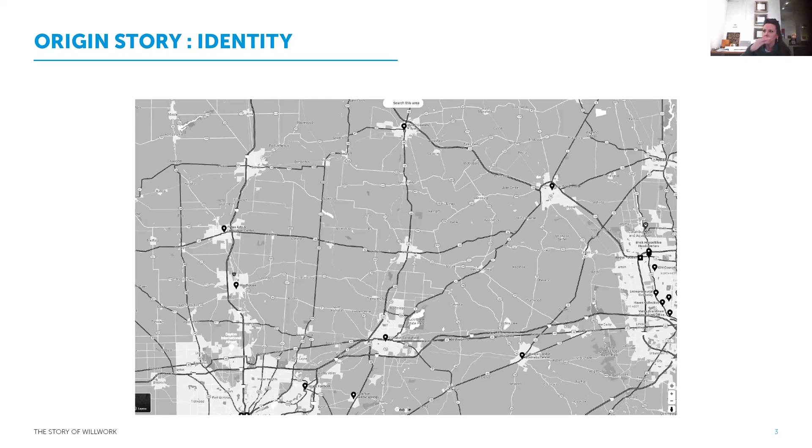But co-working is definitely something that I see as being important to the future of Urbana.

I did these three shots here for you to see. This is Urbana, and our county is very agrarian. Urbana is our county seat, with a population just over 11,000, but we are outside of a few small villages — the only city, I believe, in Champaign County.

This is a slightly larger view of Urbana — the entire city, 11,000 people. Here in the middle, the wider area, that's our downtown historic district, blown up here on the right. We have a town square, and our historic district includes that square, plus two blocks to the north and two blocks to the south.

The Willman project is right here in the historic core, on North Main Street. We are within walking distance very easily of downtown, where we have lots of restaurants, the brewery, etc.

Just a little bit of history about the development of Urbana. Urbana was founded in 1805, and its downtown district is centered on Monument Square, which features original 19th and 20th century commercial architecture typical of Midwestern county seats. The downtown was developed primarily during the railroad boom era of the 1850s to 1890s, when Urbana served as an important rail junction.

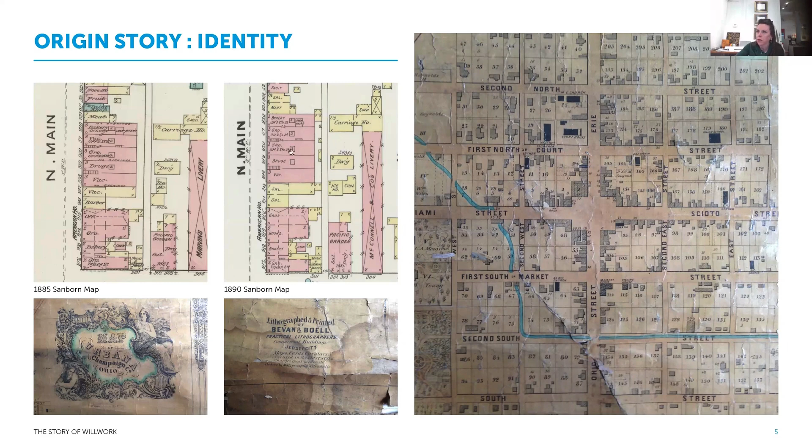One of the fascinating stories about the project was that each bay was a different business. As I read more into the history of the building, I discovered — and I don't think it's on either of these maps, it's in a later Sanborn map — that at one point an Italian shoe cobbler purchased one of the bays, or started a business in one of the bays of the building. He expanded and owned the entire thing prior to selling to the Willman Furniture Company. So an entrepreneur — this building has been full of entrepreneurs since the beginning.

All around the square, we are lucky to have an intact historic district.

Going into the Willman Furniture Company, it finally closed because the owner, the most recent owner, had some health issues and decided it was more important for him to retire. He tried to sell the business, but unfortunately, a 7,500 square foot furniture store in a historic downtown with no parking available just isn't as viable for many entrepreneurs as you would hope.

In the basement, we had interventions structurally. There's a pier here, but we have dirt floors, and as you can imagine, over the years, a lot of things were chopped up.

Getting into the concept of repurposing the building, after searching for retail tenants, specifically furniture stores, the owner Jamin wasn't able to find anybody to carry the legacy of the Willman Furniture Company forward, which was the original idea. However, he did learn about a Jobs Ohio grant, a Vibrant Communities grant given in Ohio in specific small towns that are considered economically distressed.

What they would be looking for in order to provide grant funding is a catalytic business. So he shifted his attention to trying to find a way to bring Cohatch or some co-working community to Urbana, but they didn't have the bandwidth. Build in Bellefontaine was expanding to Marysville, and Cohatch was opening 30 sites simultaneously at the time.

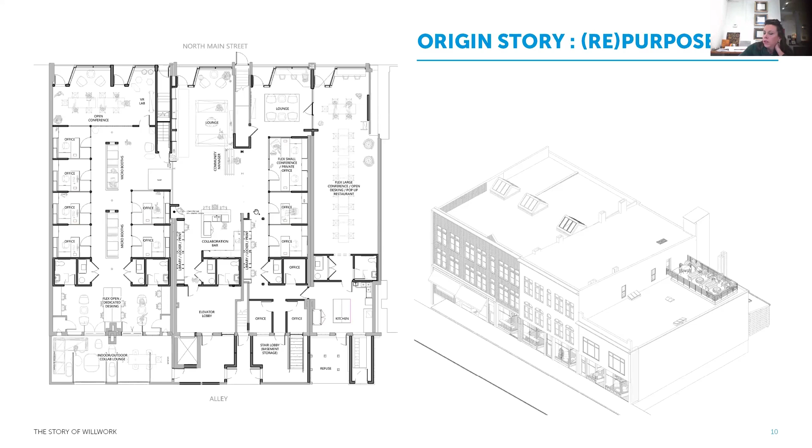And so I basically worked on this floor plan, and we started working with these 3D views of that floor plan. We started working with Champaign Economic Partnership. I think Richard Ebert is on the call, he's the director. And we worked with Vibrant Communities, Sarah Spies, and a few others to get through.

We had to do a pitch deck for the project, talking about the history, the proposed use, which was not only the co-working space on the first floor, but the upper two floors would be converted into loft living spaces for nine lofts. We also had historic tax credits on the project, and worked with Roger Farrell, a consultant out of Columbus, whom we'd worked with on prior projects to pursue historic tax credits.

So this all started in 2018, just the revitalization of downtown, and we had to prove that the business, the apartments, that all of that was feasible, that there was market demand, and sort of also represent the financial need for the project to happen.

So the catalytic nature of Urbana's downtown was kind of borderline. We were already, because of the brewery and because of some of the revitalization that had started in 2018, there was a little bit of question as to whether or not Urbana could be considered in need of the grant funding, even though we were still designated as an economically challenged community.

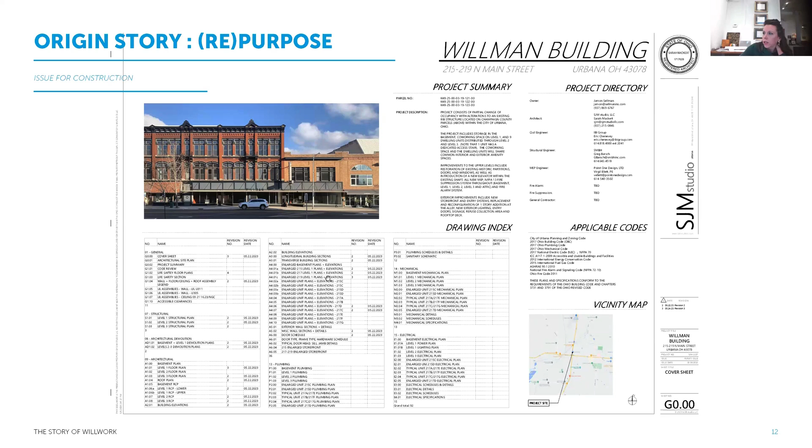So getting back to the co-working space and the architectural design - once we knew that the financing was going to work out, I put my architecture hat back on for a while and basically did the full design for the project, the construction drawings, working with structural engineers and my MEP engineers to completely renovate the building.

We did an existing building code review on this project. Some of you may be familiar with this, but when you work in existing buildings, you're able to look at life safety as a scorecard instead of conforming to current code for fire suppression, fire alarm system, all of the things that we're required to do today with fire separations, et cetera.

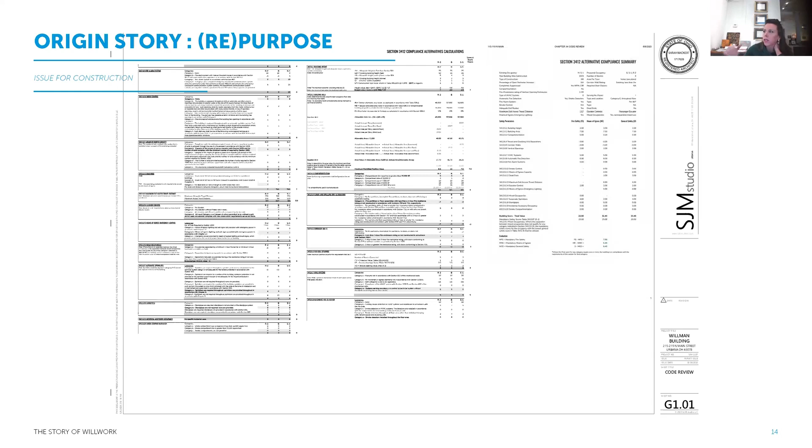We are able to basically evaluate the building and make sure that it is safe according to a specific scoring criteria. And so this scoring criteria is pretty complex, but ultimately it allowed us to save historic doors and transoms and various things. But the building will be fully suppressed, and it will have a fire alarm system with all of the bells and whistles you can imagine.

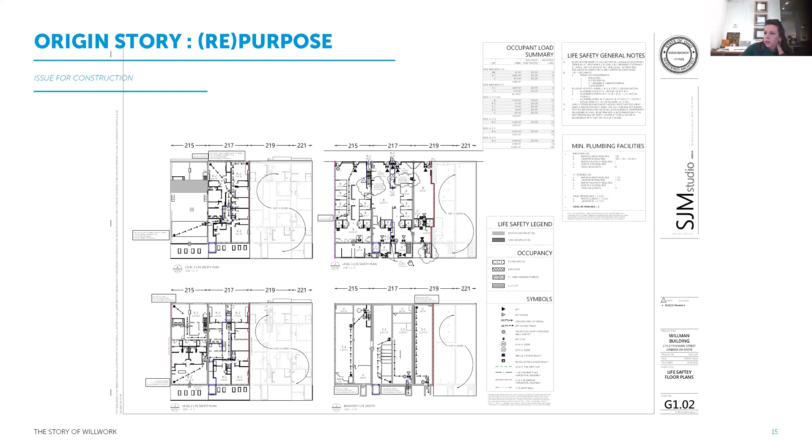These are examples of the technical documents that we create in the process of reviewing a project for life safety, and then what a construction floor plan, like the first floor, looks like—lots of interior wall type details, coded notes, et cetera.

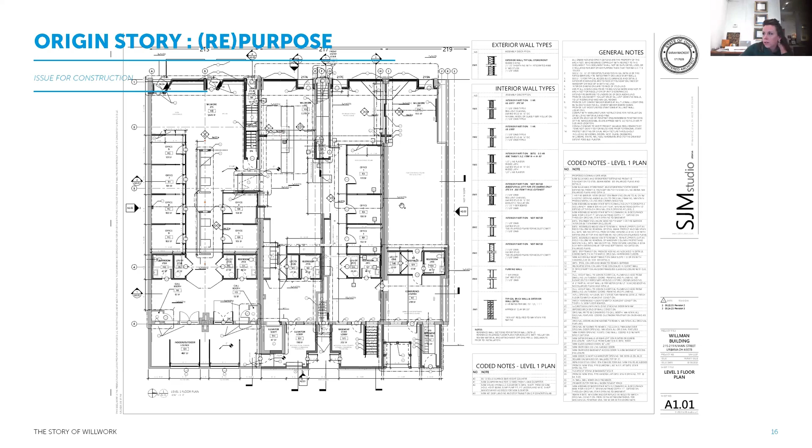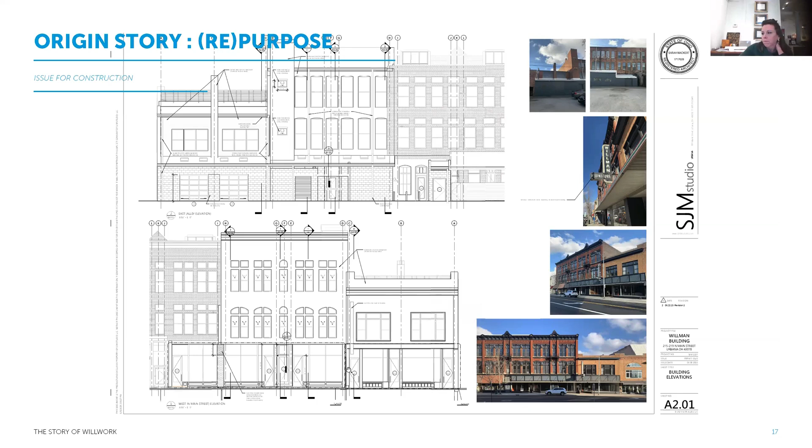So we studied historic images really closely, and we're putting back in full height storefront and five entrances—a new entrance for every single original historic bay.

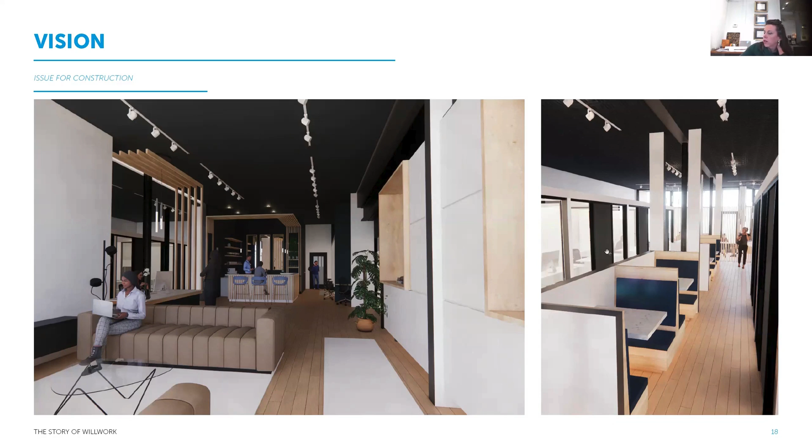This is in the southernmost bay, where we have storefront offices on each side and some boothing, like little micro booths down the middle.

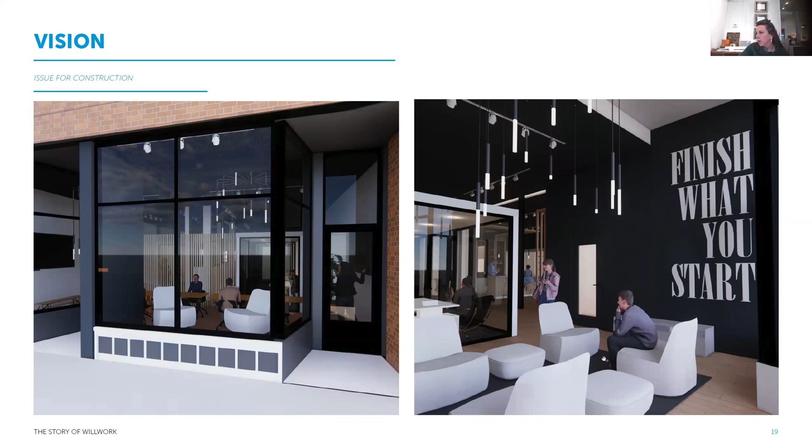A little rendering here of what it will look like from the street, looking in at one of our conference spaces. And then over here on the right, similar—this is out at the street in the slightly north area. A little breakout space from the largest meeting room on the north, and just some additional renderings here.

There will be a rooftop deck as well. Our co-working space has access to the elevator, and that will go up to the 3rd floor of the 3-story building, and then exit through a door at that level onto a rooftop deck. We'll have Wi-Fi available up there, so it will have that outdoor space.

This is just a little bit more about the business study that I had to provide for the feasibility report, looking at the market demand. We had a private jobs analysis done on Champaign—this is actually from a report.

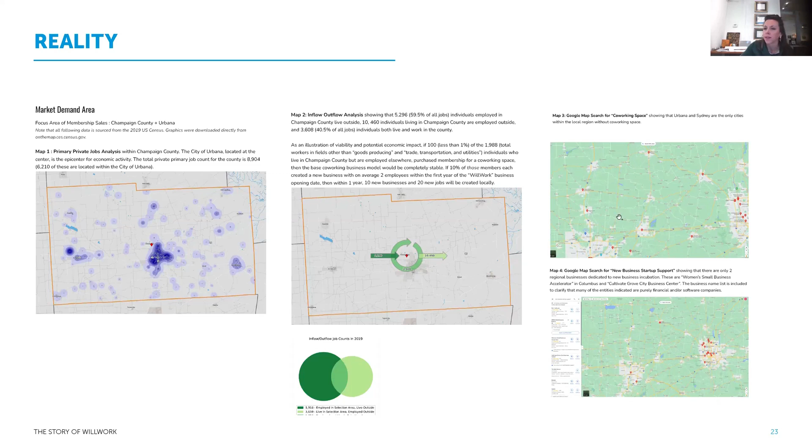And then, like I said, some of these maps show new business startup support and existing co-working spaces, leaving Urbana as an island.

Construction started in the summer of 2024.

Sorry, it will be, gosh, maybe even earlier than that, I'm sorry I can't remember. It will be the lofts - the second and third floor will be finished in April, and the co-working space will be finished in June or July.

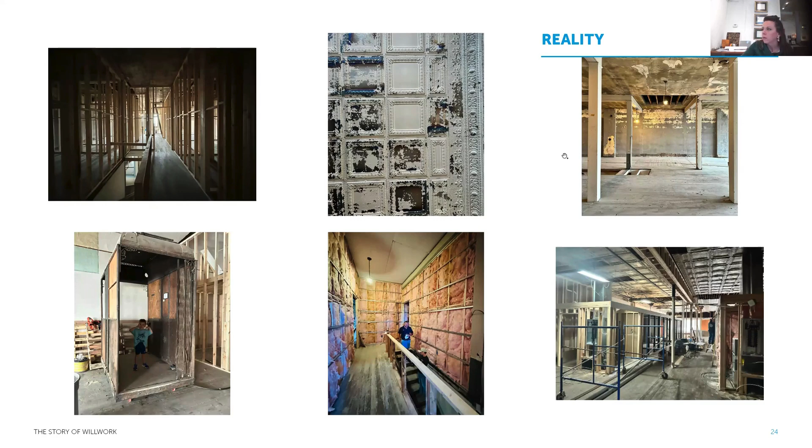This is the first floor. Framing going in, ceilings are temporarily removed for plumbing to be worked on, coming down from the apartments above. And just some beautiful lights and beautiful spaces, and so much fun to see this historic building coming back to life.

This I call elevator day. We're getting a new elevator installed in the original shaft. This is the father and son team that came out to drill the hydraulic hole down in the pit - I think it's about 49 feet deep. And so this was their drill equipment that they brought into the very, very tight alley.

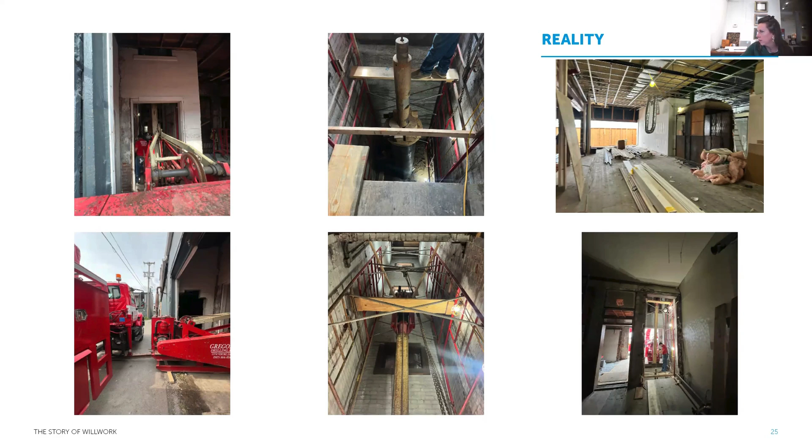And then you can see the piston here driving down into the ground below the building. Apparently, I wasn't there, but apparently they were yelling at each other quite a bit.

And these are some more photos just of the first floor. We took down the original storefront and kind of protected the building with this temporary structure here. You can see lofts going - this is a loft with the kitchen going in.

Windows, the original windows were all removed and have been restored. Brick has been tuck pointed. New roof has been put on. Electrical, mechanical, plumbing has all been added to the building, and interior storefront is starting to go in.

I wish I had about 100 more pictures to share with you today, but there's so many and there's so much to say, and I thought I better stop at some point for questions.

No questions? I'm shocked.

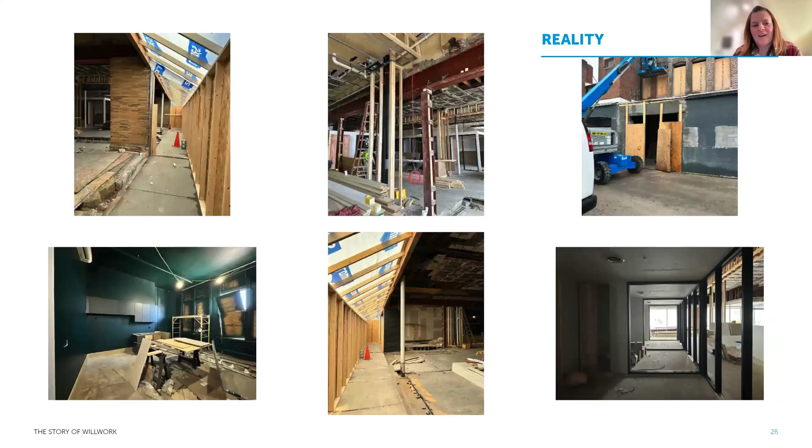That was a lot of great information, Sarah. I know that you've shared with us how energized the community seems to be in Urbana and around the county, and I can see why this is going to be inspirational for the entire area. It's obvious how much you care about the history of the building, and I just think it's going to be even more special because of all the details you care about and have worked hard to preserve.

It does look like we had a question from Matt Yerkes, which I think Sarah, Danielle, myself, any of us could answer. You want to go ahead?

Sure. So, as you can tell from this presentation, we have the expertise of architecture and design through Sarah. She has a very strong vision for how she wants the community to run and the programming, and that is well set. Then you think about running the day to day and the technology and the billing and all the back end process and procedure and technology that we've already established here at Haven. So we're very excited to be able to bolt that on to Sarah's vision. We have a very similar approach to how to manage a community and what the brand standards are. So it was a really nice opportunity to expand on what we're already doing here at Haven to pull another community into ours for the benefit of all.